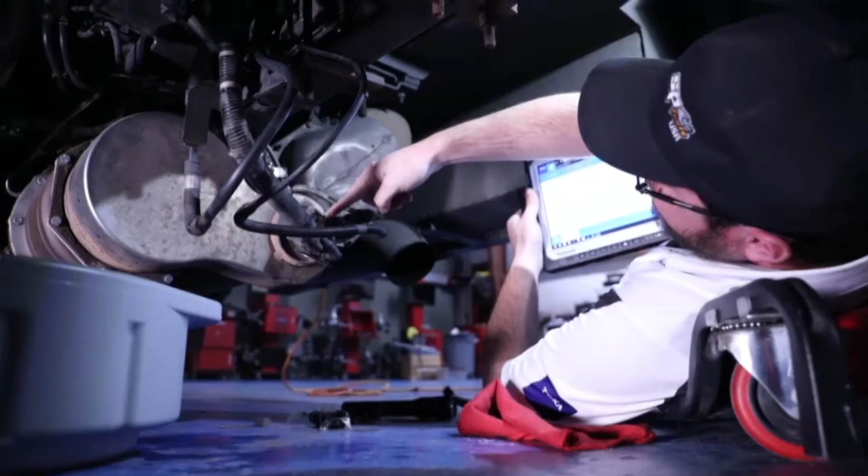Today I'm going to take you on a quick walkthrough and demo of the TEXA Truck Software. TEXA offers some of the most robust and complete coverage out of any aftermarket HD truck and medium duty truck scan tool. So let's dive in and take a look.

Alright, this is the first screen where we make our first selection of what type of vehicle we're working on, whether it's heavy duty, medium duty, or light commercial vehicle. We can also make selections just by powertrain if you just want to select the motor you're working on, or if you want to make a selection on the trailer. That's useful for like Wabco Bendix systems and the trailer brake systems.

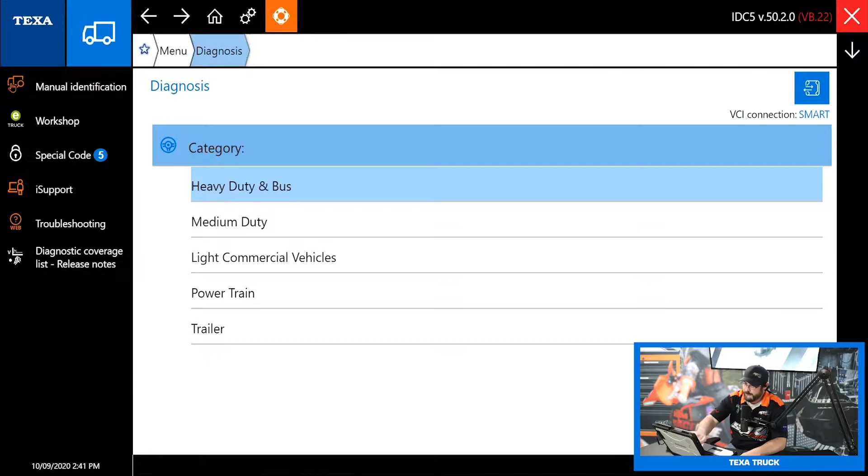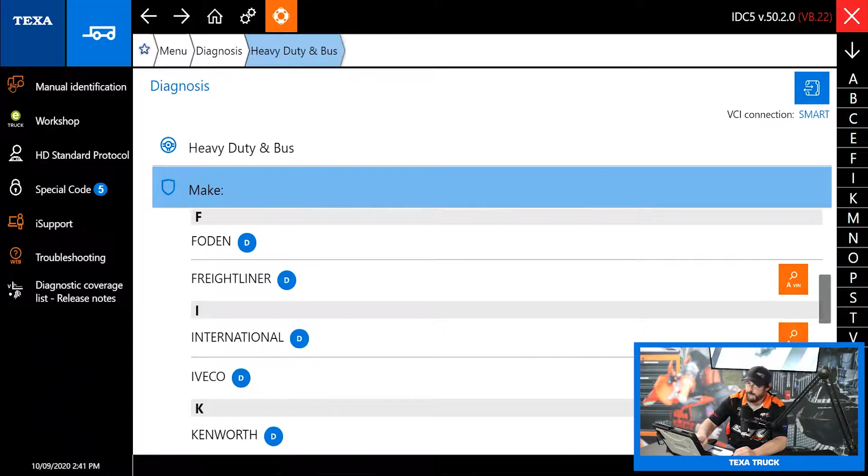Alright, so let's jump right in. Let's go into heavy duty and bus. And today I'm going to take a look at a Freightliner with a Cummins. If you guys can see the orange button on the right hand side of the screen, that's the automatic VIN scan. That can save you a little bit of time. If you go in, it'll just scan the VIN on the vehicle, make the selection for you, and then you're done. Today, since we're doing a demo mode, let's jump in. Let's say we're working on a Cummins.

Alright, so let's take a look on the far left hand side of the screen. The first option you guys see there is the eTruck Workshop. Now, if you're not familiar, eTruck is actually TEXA's remote diagnostic tool. It is way more than like telematics or fleet management. It will actually let you diagnose, clear codes. If you have a truck sitting on the side of the road in regen that's 2,000 miles away, you can, from your computer, reset the codes, clear the codes, do your DPF and SCR resets, and force a regen all from anywhere in the world as long as you have an internet connection.

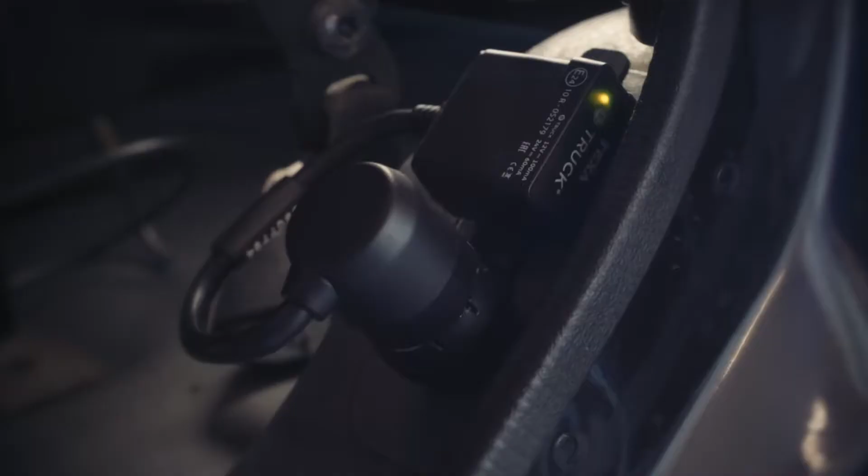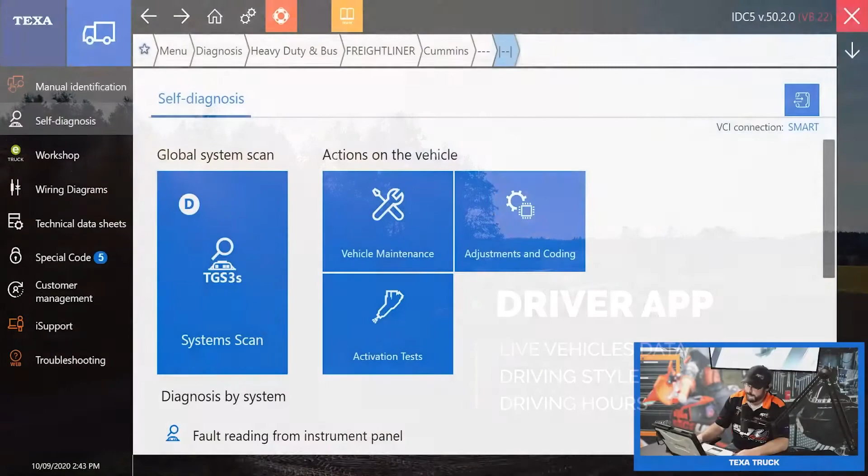So it's extremely useful for fleets in saving on a tow bill, which can be over $1,000 if you got a 53-foot trailer and a sleeper cab truck that's loaded down. I mean, that's going to be a hefty tow bill. So your shop foreman can force the regen from sitting at his desk at the shop, and also pull off any data he needs.

All right, so our next option is wiring diagrams. So let's take a look real quick. Let's go into diesel injection. We got to pick which engine we're looking at. So let's go ISB 6.7 with the CM2350, a pretty common setup nowadays. All right, as you can see, we got access to all the wiring diagrams here we would need for the engine. I can actually tap and select, and it'll just tell me what that component is on the wiring diagram, like it's the engine fault warning light.

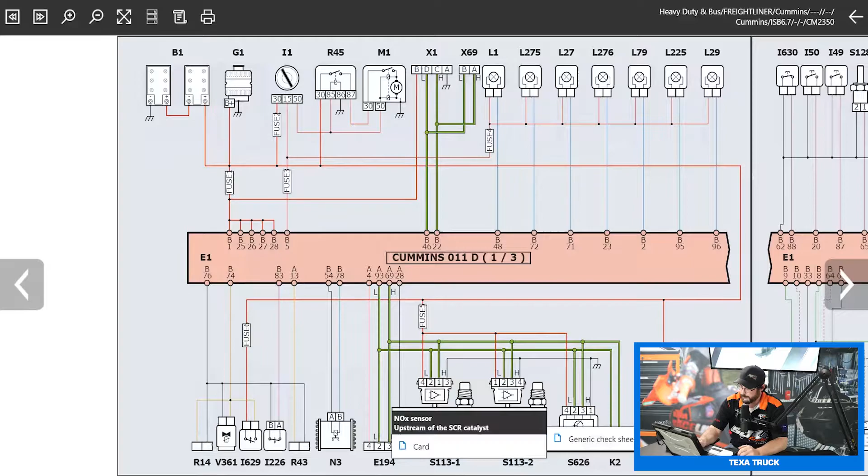Let's see what this sensor is here. This is a NOx sensor upstream of the SCR catalyst, and some of them will have this card available. This one's just a generic card. So this basically describes what the sensor does. It'll give you a picture of what it looks like, and actually the theory and operation of how it works, which can be really useful. If you want to be a good technician, understanding how the system works is the first step into making a proper diagnosis, in my mind anyway.

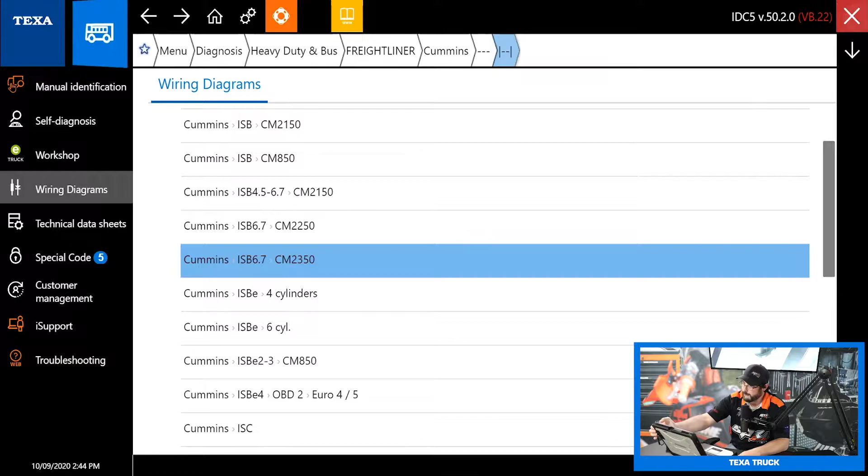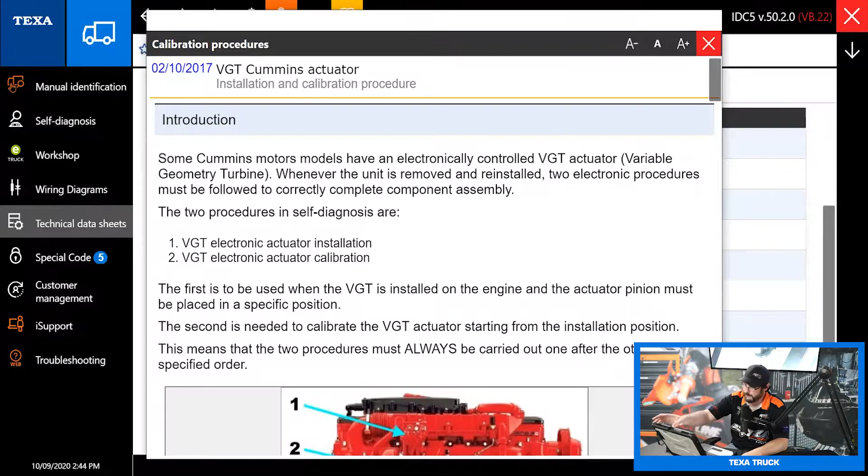Really handy for that procedure.

All right, the next one is this. You'll see this special code. Now, in the past, the web special code basically will unlock all of the really advanced functions of your TEXA scan tool. And the way it used to work in the past is you always had to have an internet connection, because it wants to talk back and forth to the TEXA servers to kind of track what you're doing when you made the repair to the vehicle. So if something does go wrong, we can go back through that data and make the adjustments we need to.

But now it works on a token system. So as you can see, the number of special adjustments I have left are 5. So now I can make 5 high-level advanced adjustments in the settings menu, which I'll get to shortly, without having to have an internet connection. So if I'm in the field, way out in the middle of nowhere with no cell signal, of course no Wi-Fi, that's not going to affect my ability to repair the vehicle.

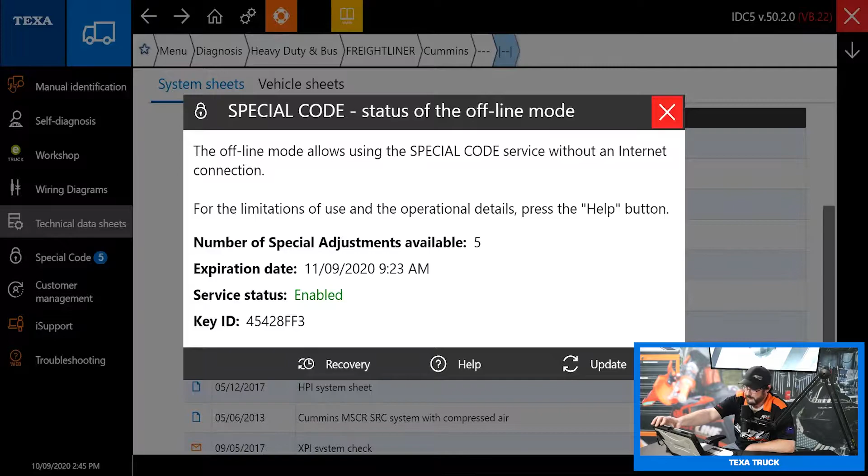All right, next one is just customer management. So this will let you store a diagnosis essentially on a customer by customer basis. So if you ever need to go back and reference a diagnosis, you can go back and view that information, if you need to be reminded of repairs you've done in the past, and that can be really useful.

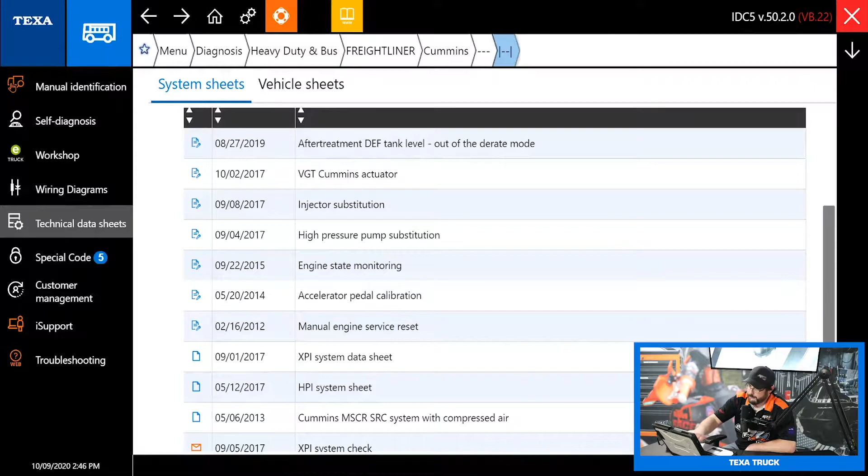Alright, that covers all the major points I wanted to hit, so let's go back to self-diagnosis here. Our first option is the TGS3s scan, so that's going to be the total global scan. That is going to ping every module available on the vehicle and then show you the status of it, whether it's got communication or not, and tell you if there's trouble codes present and how many trouble codes and what they are. So we have a demo mode available on this, so let's jump right into it. I want you guys to see what that looks like.

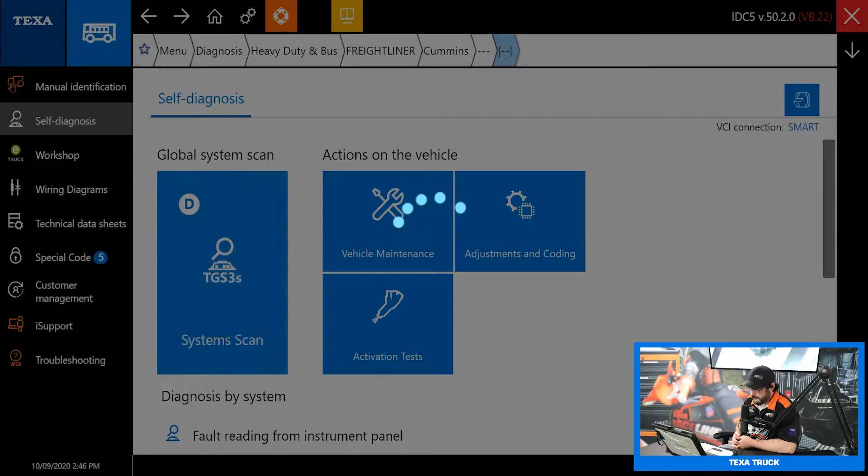Alright, it wants to turn the key on. It's going to go ahead and scan. It is worth noting this is a recording from a live vehicle. This isn't just a simulation somebody made on the computer. This was all taken off of a live vehicle.

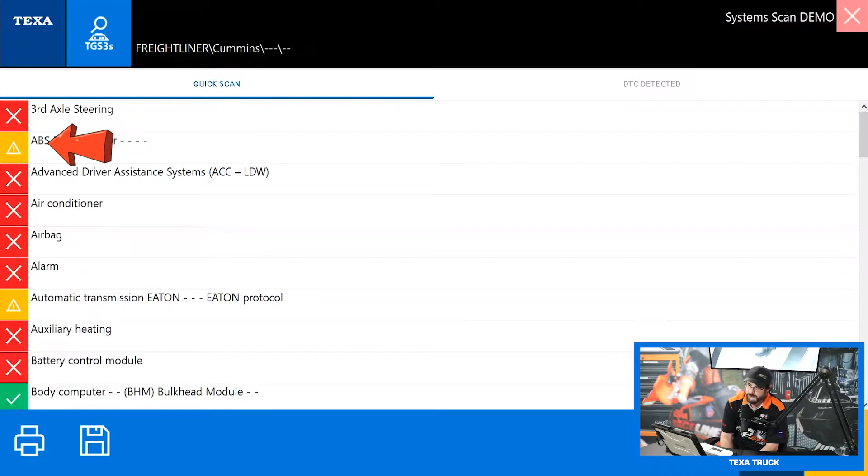Alright, so you see we got a lot of colors here on the left hand side of the screen. The red X, that means that we have no communication with that module, which generally means it's not installed on this vehicle. Like this vehicle wouldn't have an air conditioner module, so we don't have communication, so it just gets a red X. The yellow symbol with the triangle, that means that module is available and we have trouble codes in it.

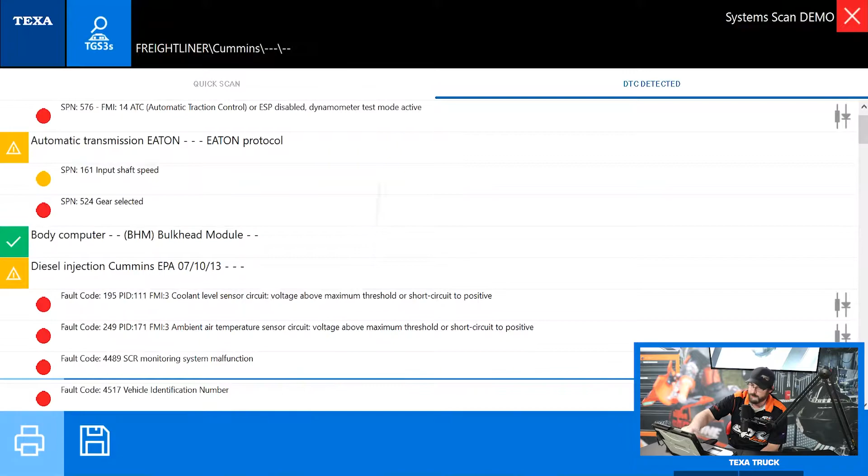So real quick, there's a couple of different ways you can do this. I just like to hit this flashing button in the bottom right, and that will expand and drop down all of the modules so I can see what all the codes are in every single module. So like in diesel injection, what do we got? We got coolant level sensor, ambient air sensor, SCR monitoring system malfunction, and also we can go ahead and see our automatic transmission codes and our ABS codes all on one screen, which is really nice.

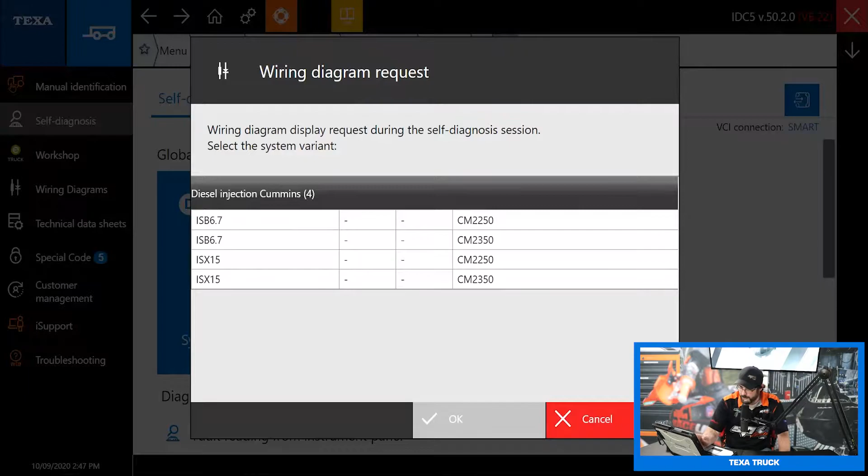And a new feature they did just add, if I select one of these codes, you can see on the far right hand side I have a wiring diagram icon. So that means I can highlight that code and I can hit the wiring diagram button. All you got to do here is pick which engine you're working on. So we'll say we're on an ISB6.7 with the CM2350. Then boom, see it's highlighted that sensor for me right on the wiring diagram. So that makes for a fast and easy diagnosis right there.

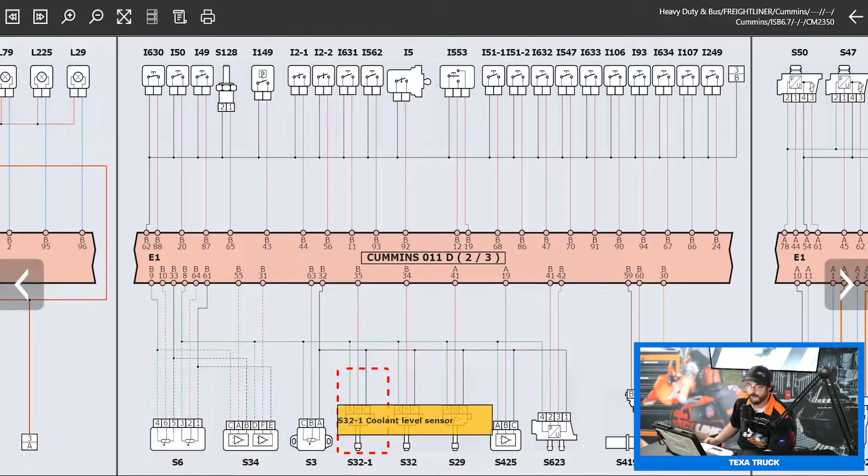See I got a 3-wire sensor with, looks like it's probably a common ground, and then in the middle wire we got our signal wire to the ECM, and then a common power. So immediately I know I can check my signal on the purple wire, see if that matches what the ECM is saying, and then I can verify if the sensor is good or not, check my power and ground, and then without having to go to another computer for any additional repair information, I can make my diagnosis right then and there. So that's really handy, really fast.

Now if I want to go into a module and get more in-depth information, all you got to do is just double click or double tap on the module itself.

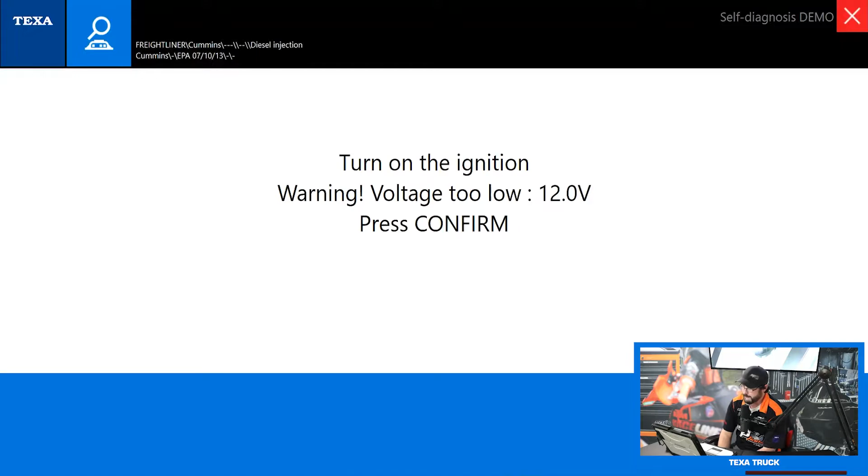And also warn you if you think your battery voltage is getting a little low, which is handy. Can't tell you how many times I've had a battery get too low and I'll lose communication during the middle of a diagnosis, and that's frustrating because I forgot to hook up my battery charger.

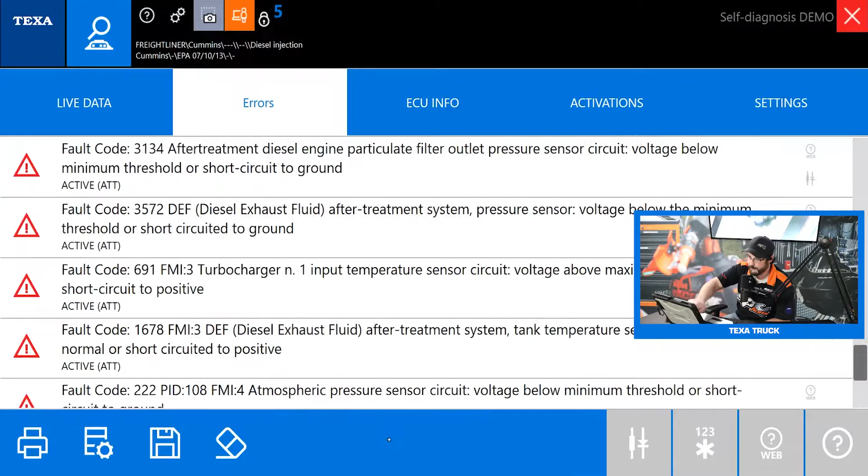Alright, so you can see right away that it defaults us right to the error screen or the fault code screen. That's usually the first thing you want to see when you're diagnosing a vehicle. And you'll have different colors for different faults. See, all these are red, and that means they are an active fault. Something's going wrong right now and the computer sees it, so that is an active fault. If it's yellow, that is a memory fault or an inactive fault. Green, when it turns green, that is when you've cleared the code.

So if I press the eraser button right here in the bottom left, that will clear all of the codes. And instead of all those just disappearing, it will just turn that icon green to let you know that they've been cleared, which is really nice. There's been a few times when I cleared codes before I really should have, and it's nice to be able to go back and reference what those codes are, so you can go make your diagnosis from there. And those will just stay green until you back out of the module and then go back and start your diagnosis again, and then they'll actually be gone. You won't be able to see them after that.

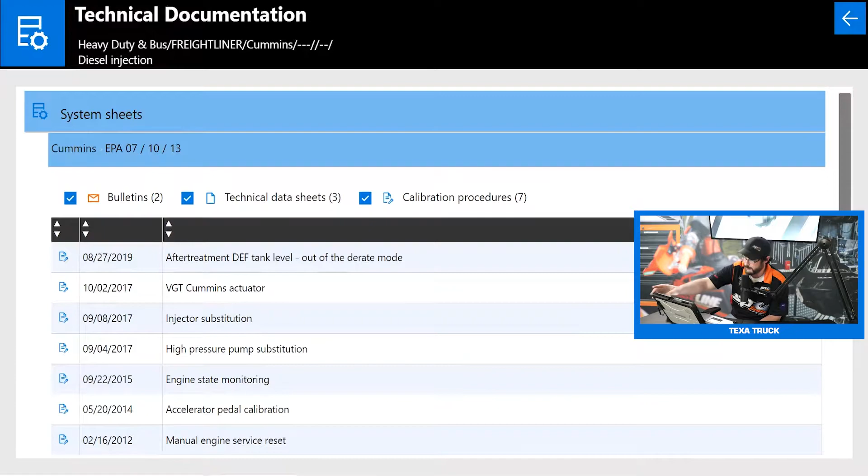Alright, the other buttons we have available on the screen, bottom left we have a print button, so we can go ahead and print a report. The next button close to that is just a shortcut to the screens we were looking at earlier. So system sheets, vehicle sheets, and wiring diagrams are all available here. So like if I go here, there's that VGT Cummins actuator calibration procedure. So you'll kind of see that button sprinkled throughout the software because it's really nice to be able to reference that no matter where you are. We can save this, so essentially that's just saving a report of what all fault codes are here, and then of course the erase button.

Now I want to talk about some of the buttons we have on the bottom right hand of the screen here. Now if you look at every single one of these trouble codes, you see some little icons off on the right. And the first one is the web icon, and that is TEXA's additional repair information. That is called iSupport. And that is an additional subscription.

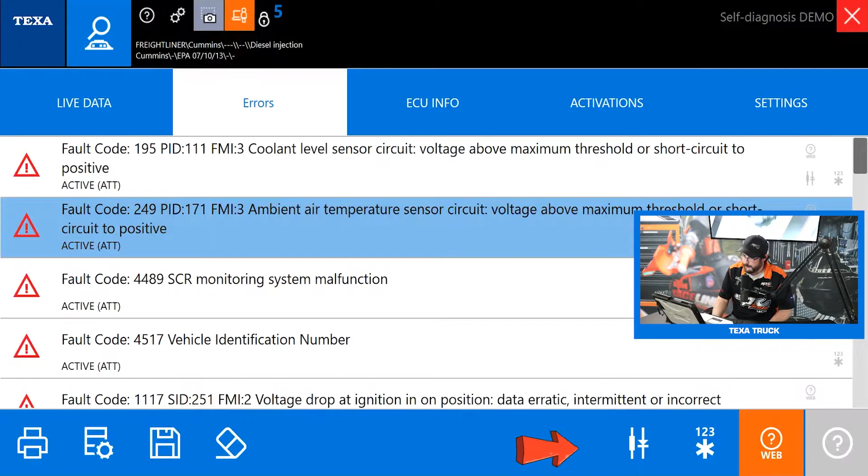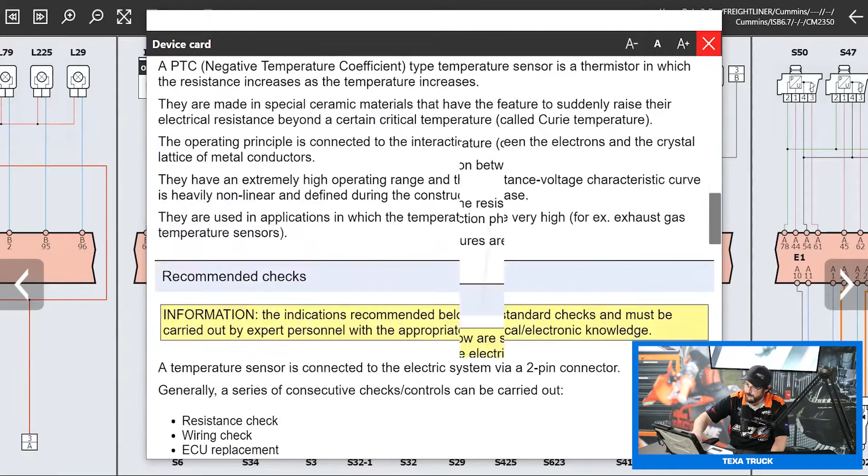All right, the next button is just the wiring diagram button. And that is the same as earlier. If I highlight a code, select my engine, and then it's going to take me straight to the ambient air sensor on the wiring diagram immediately. I can see it is a 2-wire sensor. There's a card available for this one. And here it's going to take me to a temperature sensor card and give me the general theory and operation of that sensor and a picture of what it looks like.

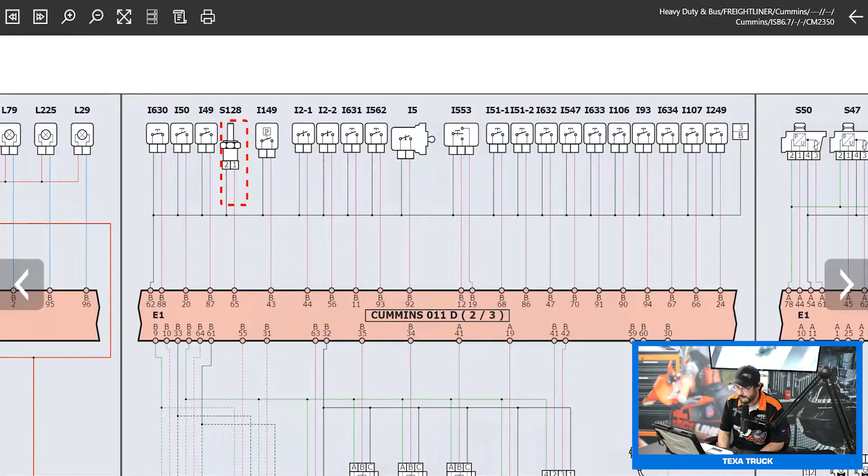So right away I can see, looks like we got a common ground and then a signal wire to the ECM. So I can go ahead and check my ground, check what my signal wire is doing, and I can make my diagnosis from there. Easy peasy.

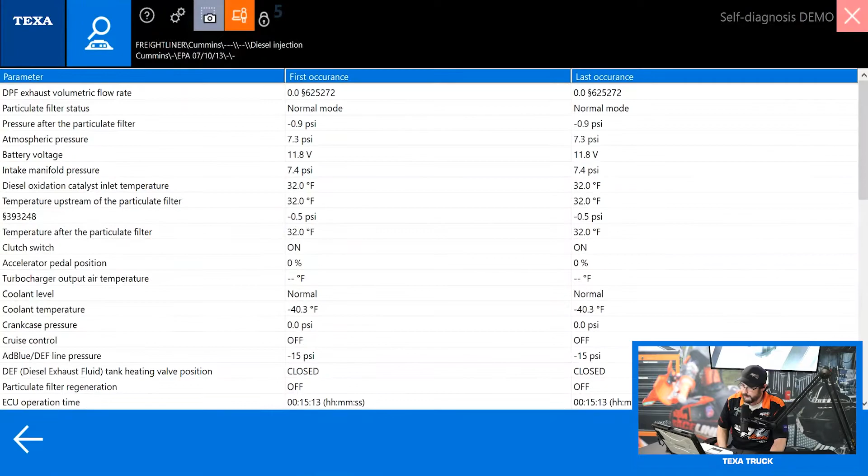Alright, last button is just the freeze frame information. That'll just give you your freeze frame information for when that code was stored, which can be handy in a diagnosis for sure. Alright, so let's jump over to our live data screen.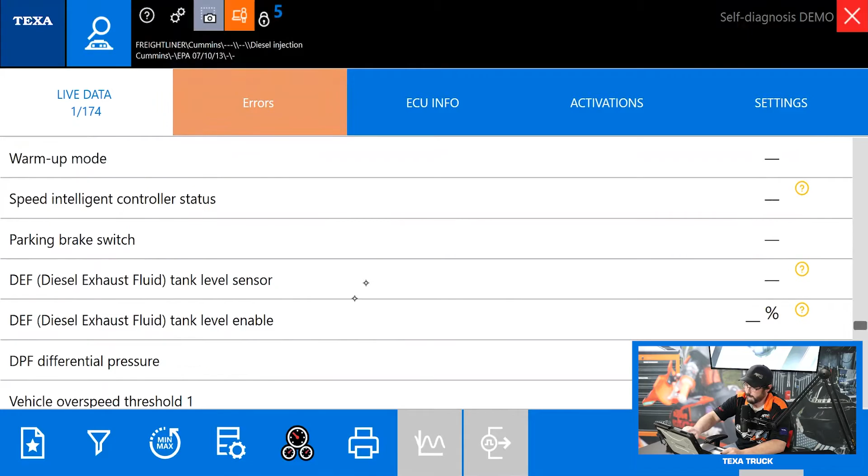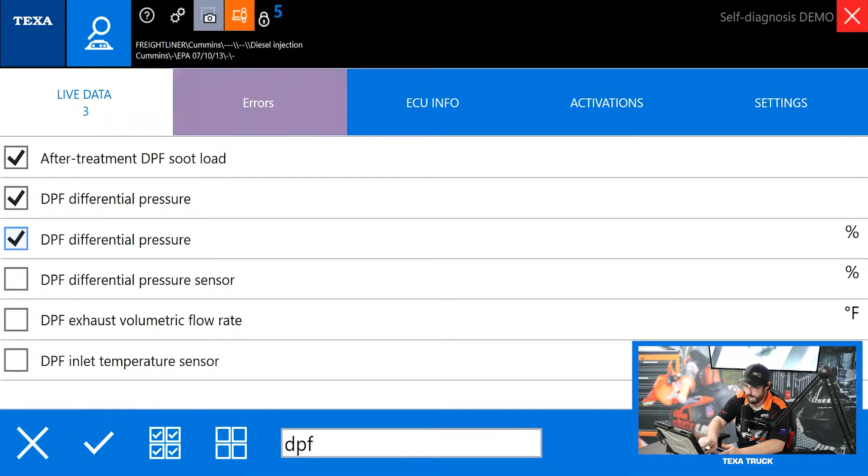As you can see, we got a ton of data PIDs, 174 data PIDs on this engine. And if you're scrolling through here trying to find one that you need, it can take just way too long. So what we can do here is we can use our filters. So now I can just go here and I can just type in, let's search for DPF. Because usually you want to see your DPF soot load, so we want to see all our differential pressures. Hit our check mark, boom, there's all of the data that I want to see.

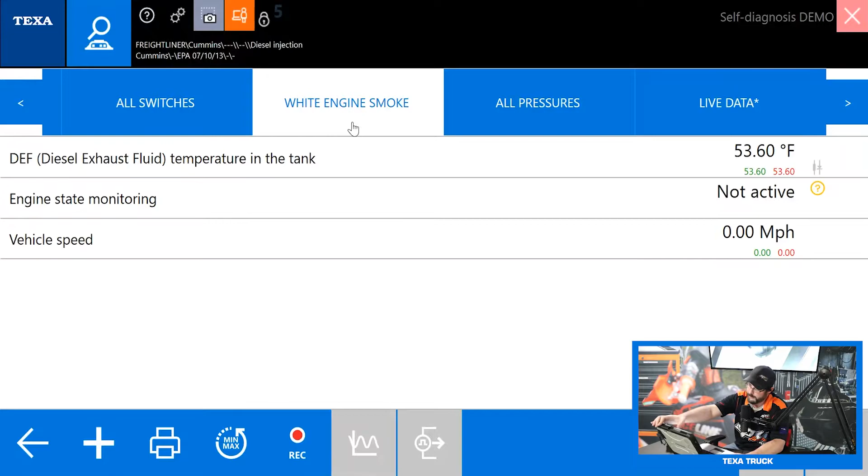And also another thing you can do with filters, you can go to a favorites list. And we have some already pre-made for you of some data PIDs we think you want to see, like if you have white engine smoke, here's some data PIDs you may want to look at. But you can also save. You can see, I hit this plus button, type DPF just like I did before.

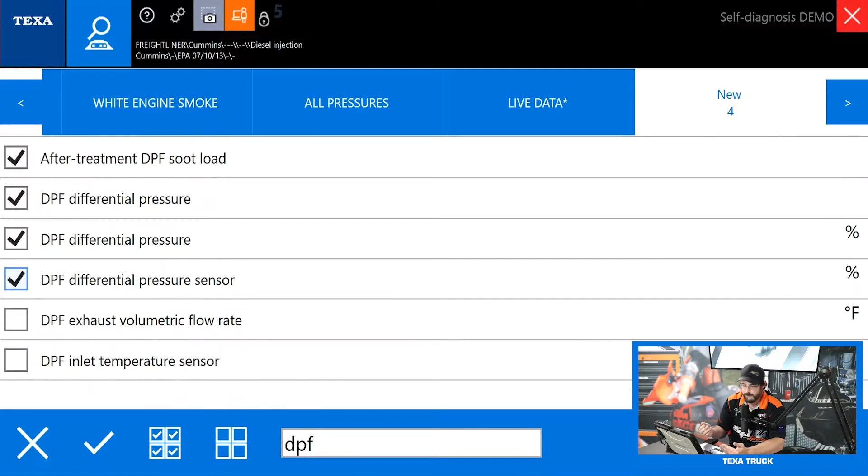I want to see all these data PIDs on a particular screen because that's like a common thing I want to do when I'm checking the aftertreatment system, which you'll be doing a lot with these vehicles. I hit check. I'm going to save this as DPF data. Boom, there we go. That will always be there now. Not just on this vehicle. Anytime I work on an EPA 2013 ISB with a 6.7 and CM2350, which is a really common setup, this option will be there. My customized saved data PID list will be there, which is really handy.

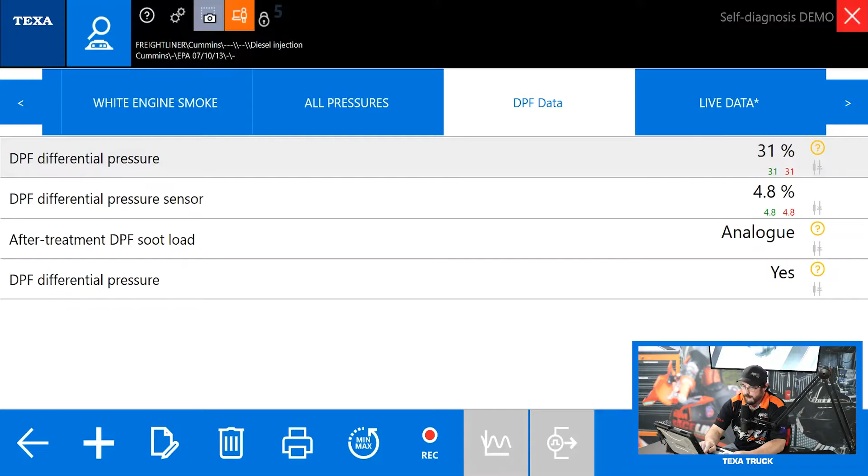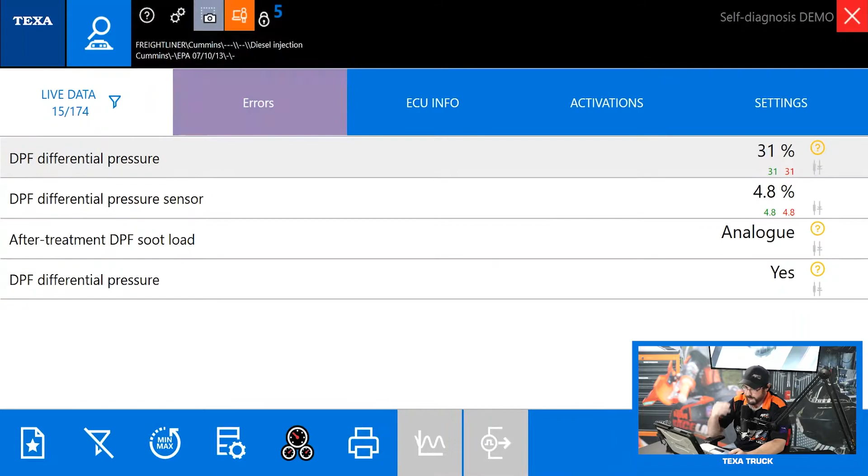And you can also, all these other buttons down along the bottom, we just have the edit button going from left to right, then the delete button, you can trash it, and then of course you can print the report. So let's back out to our main live data. If you want to get rid of your filter, you just press the filter button again. Now we're seeing all the data PIDs.

The next button, going from left to right, is the min-max refresh button. All that does, you see these two little numbers under every data PID that are red and green. Those are our minimum and maximum value, and the reset button just resets that if you want to see your min-max again. Next button is just the same shortcut to our technical documentation. I'm not going to get into it again. It's the same stuff, same place we found the VGT actuator calibration.

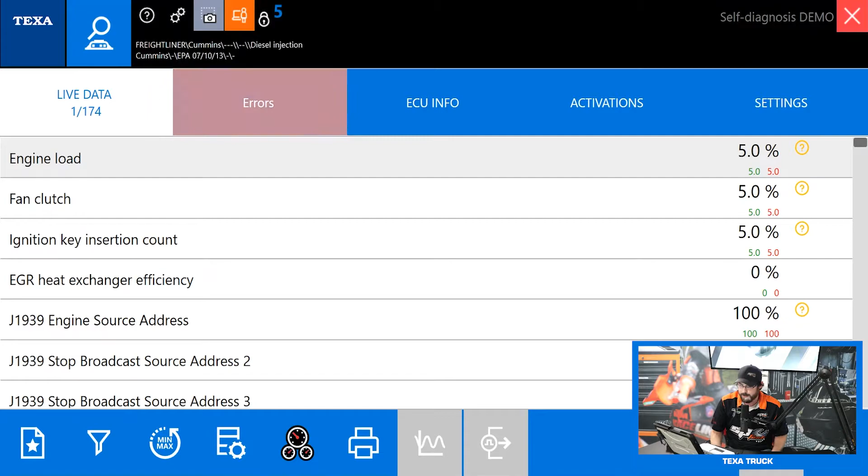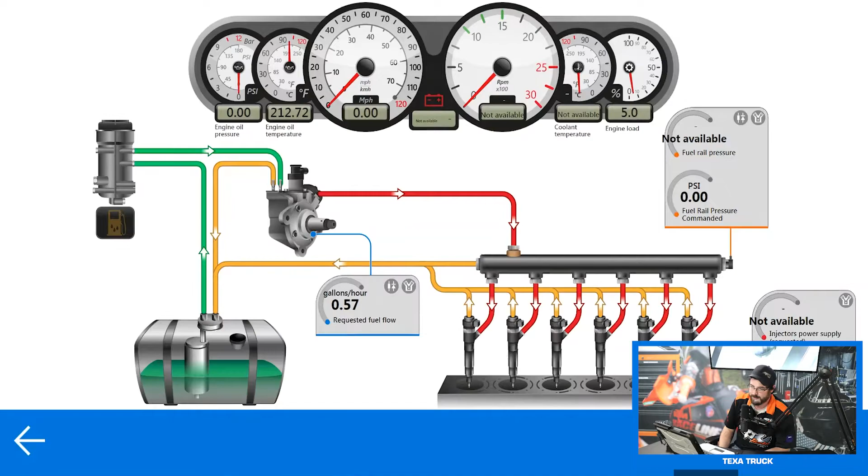Alright, this next button is pretty neat actually. This is the dashboards. So this is just a visual representation of the data, and it can help you make a lot more sense of the live data. So this first one is just our fuel injection. So we can see our fuel rail pressure commanded, injector power supply, gallons per hour of fuel coming in.

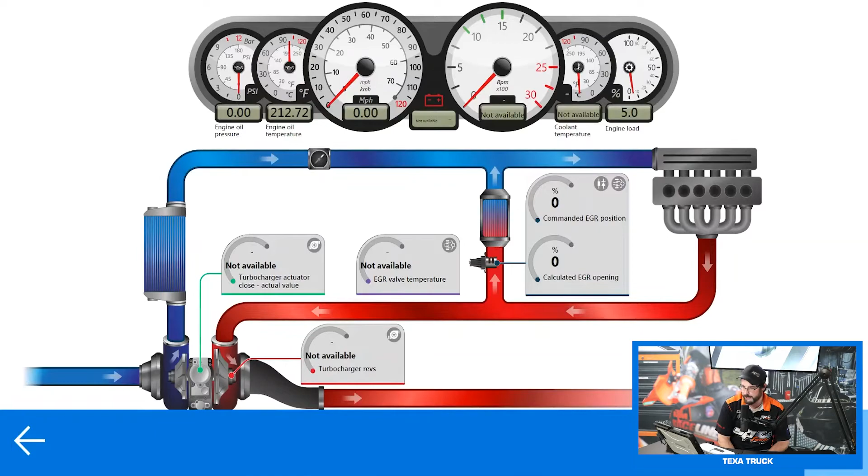Well, if you arrow over to the right, now we're seeing the turbo. So we can see data like our EGR valve temperature, turbo actuator close actual value, and turbocharger RPMs all laid here in a visual way that makes it a lot easier to understand. And what dashboards are available will depend on the vehicle. They're available on most everything.

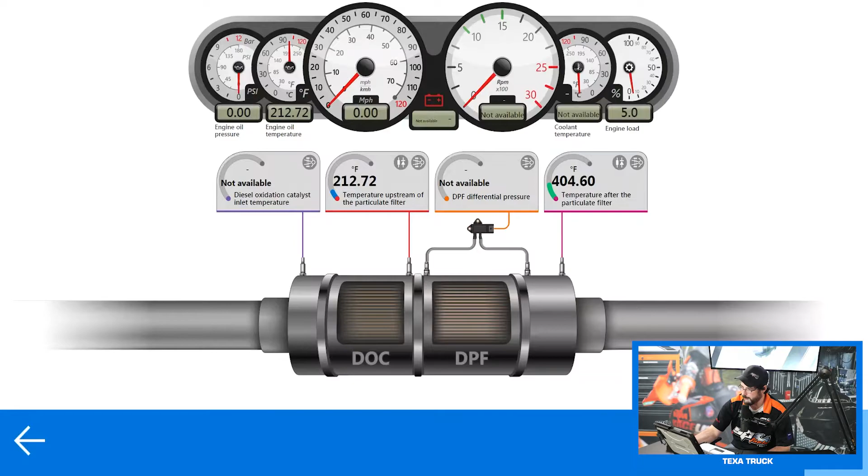This one is really handy too, actually. This is the aftertreatment system, so you can see your pressures and temperatures of the DOC and the DPF, and then the SCR system, so you can see NOx levels, diesel exhaust fluid temp, dosing rate, things like that. Alright, so that about covers the dashboards.

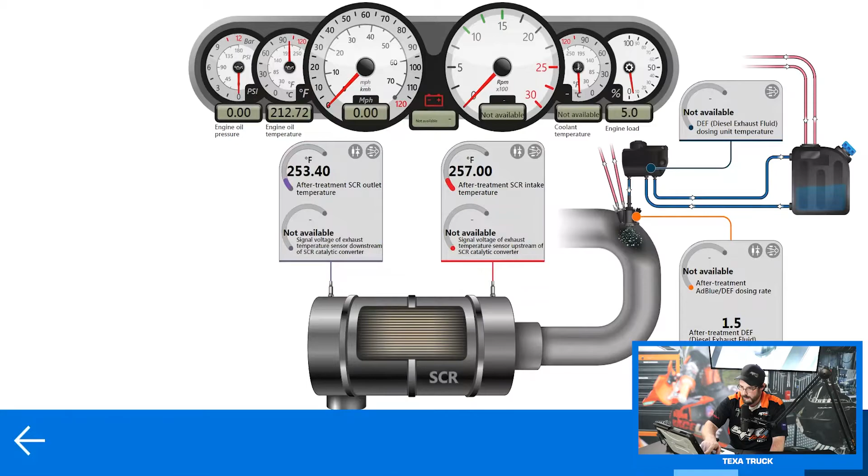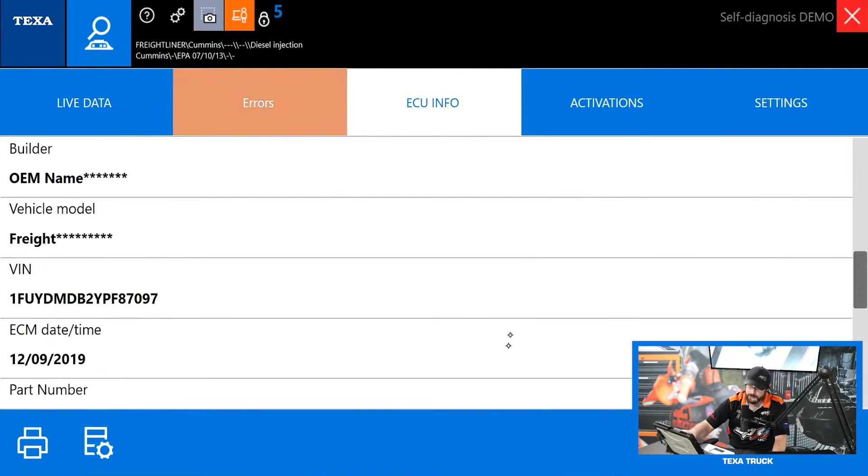The last button is just a report print button, so that's just going to print a report of all of our live data. So let's jump on over to the ECU Info tab. This is going to be all of your ECU control unit identification numbers, calibration IDs, serial numbers, VIN number will often be here as well, and your engine operating hours, which a lot of you guys like to see, will be right here in ECU Info. So not much going on there, just some general data that you may need to make note of.

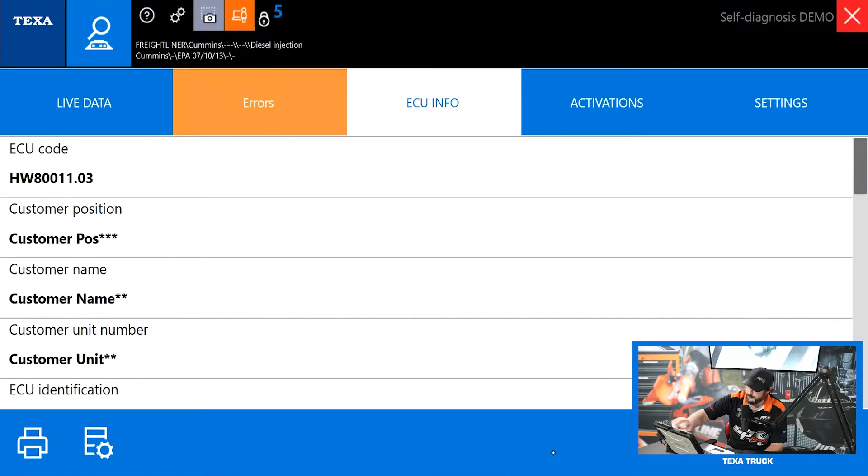Alright, so let's jump over to the activation screen. Activations are just things you can turn off and on and tests you can run, not stuff you can change permanently. So here we have like our DEF system leak tests. Your cylinder cutoff test will always be here in activation. That's a common one guys will use.

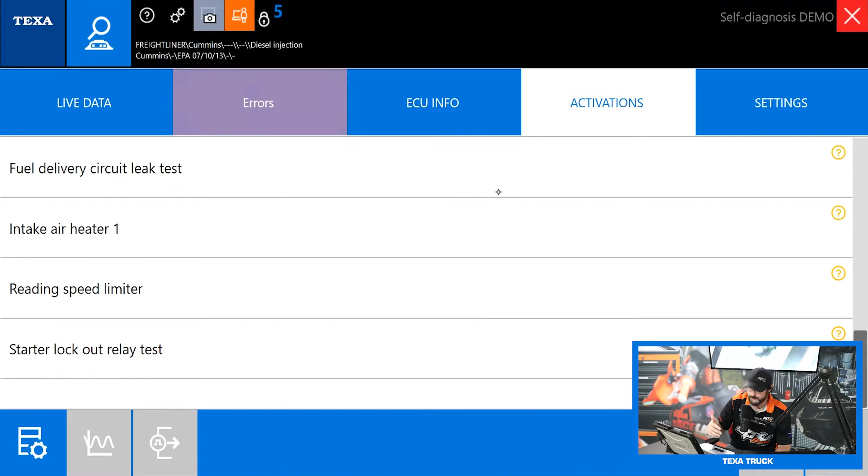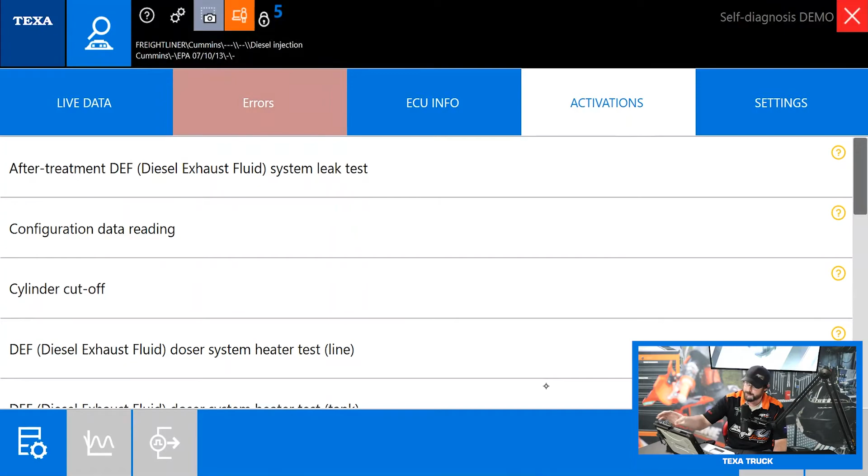Fan test, like if you want to turn cooling fans on and off, you want to actuate solenoids, that's always in activations. The main difference between activations and settings is stuff you can change permanently. So when you change this stuff, it will stay changed. So let's take a look at settings real quick.

Hang on, no, we're good.

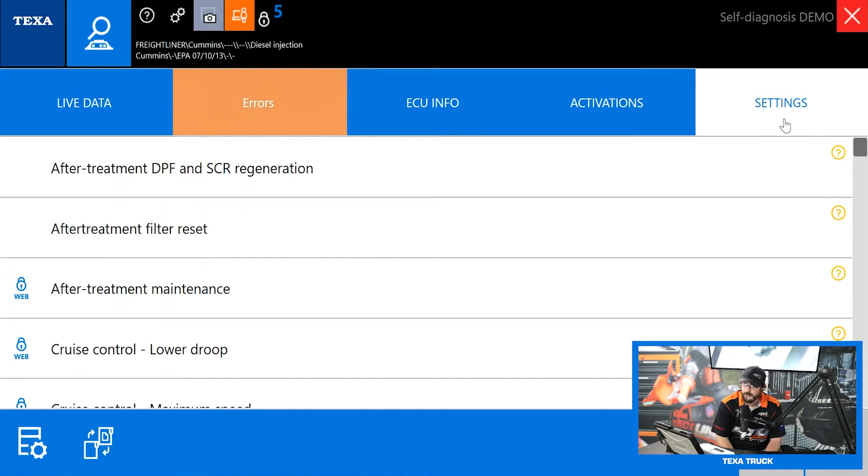So let's take a look at settings real quick. This, like I said, is going to be all the stuff you can change permanently. And you see a lot of these have the web lock icon on the far left side. When you first get your scan tool, there will be a form in the box you need to fill out. That's just called a web lock form.

Basically, all it is is a waiver saying that this software is capable of some very advanced features and functions. If you don't know what you're doing and you go in here and start mashing buttons, you can really mess stuff up. And basically, that's just saying that's not on us if you get in here and start pressing buttons and mess a truck up.

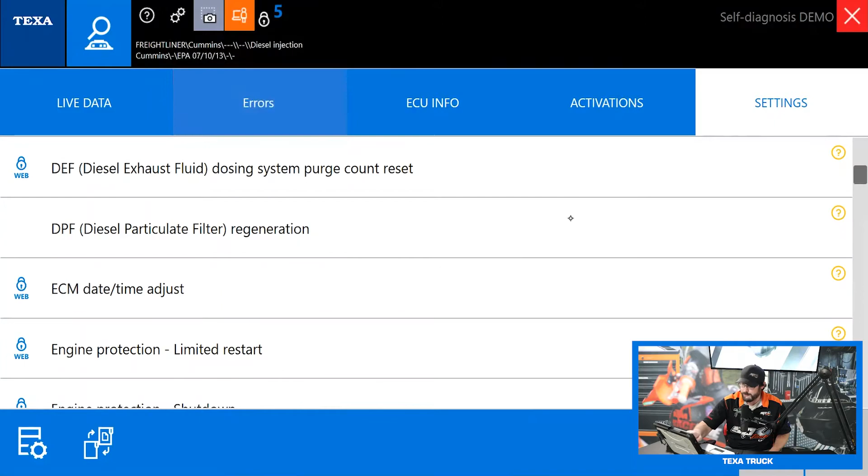But most common things people want to see in here are like after treatment filter reset when you either clean or replace the filter. Your DPF force regeneration will be in here as well. Another one is, of course, idle speed and idle shutdown. You can either change the time it waits till it does idle shutdown or turn it off altogether.

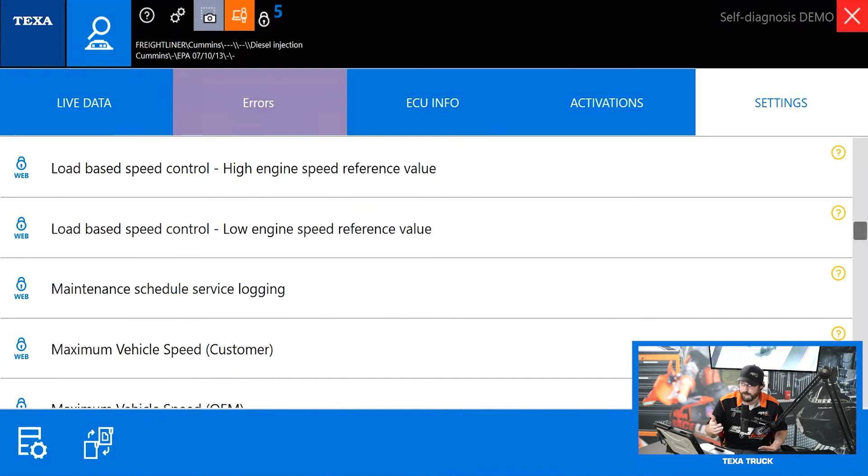Something I do want to touch on in Cummins in particular is the maximum vehicle speed, because speed limiters are something that customers want to change a lot. And the way it works, you have the OEM speed limit and the customer speed limit. And you have to change both of these. The customer limit can never exceed the OEM limit.

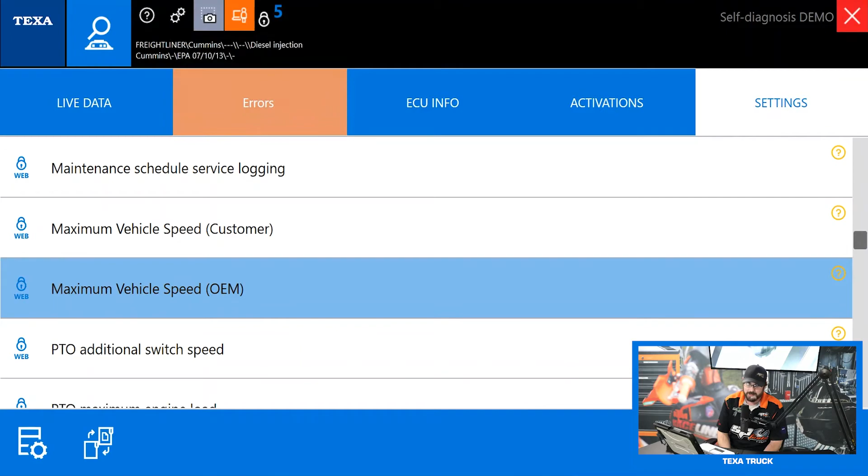So say your OEM speed limiter is at 60 miles an hour. It doesn't matter how high you put that customer limit, it will never go over 60. So the procedure for changing the maximum vehicle speed is go in here, change the OEM speed first to what you want it, and then change the customer to match it, and you're good to go. That's all there is to it.

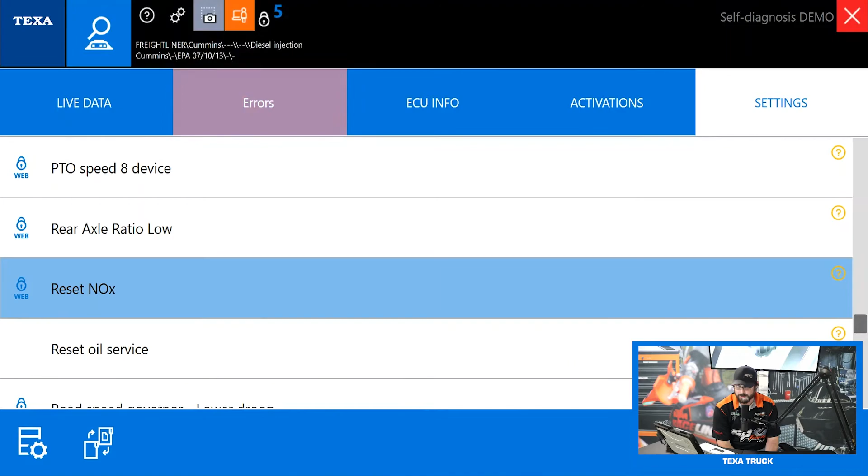Also got your PTO, all your PTO configurations are in here. Reset NOx, that's one you're going to be using a lot in Cummins. So the procedure for that is generally when you want to do a regeneration, you reset the NOx first, then force the regen. That's how you do a regen on a Cummins CM2350. Pretty simple, easy procedure. Once you start it, it'll just go and go.

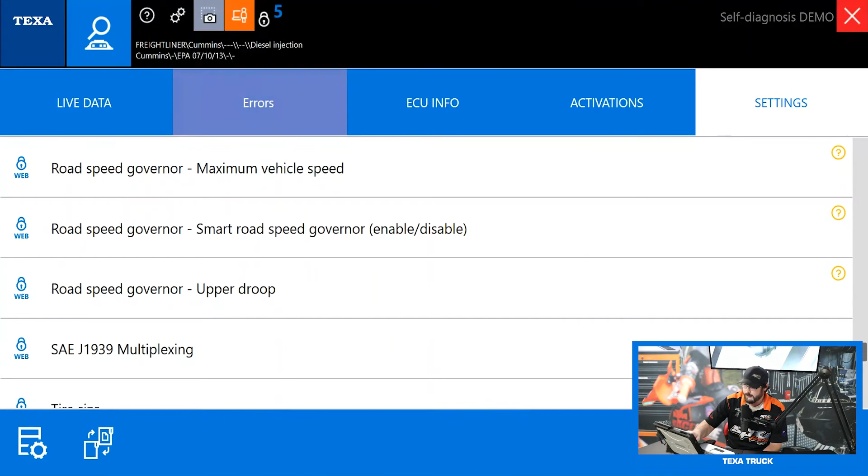Let's see, something else. Yes, down here at the bottom, another common one. VGT electronic actuator calibration will live here as well, and installation. And again, in the bottom left, you have a quick shortcut button right to the technical documentation where it will give you the step-by-step walkthrough and procedure for doing that VGT installation and calibration.

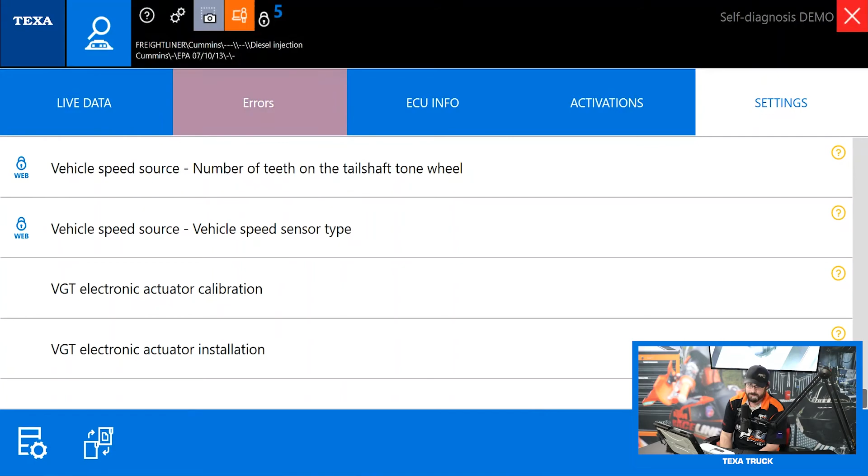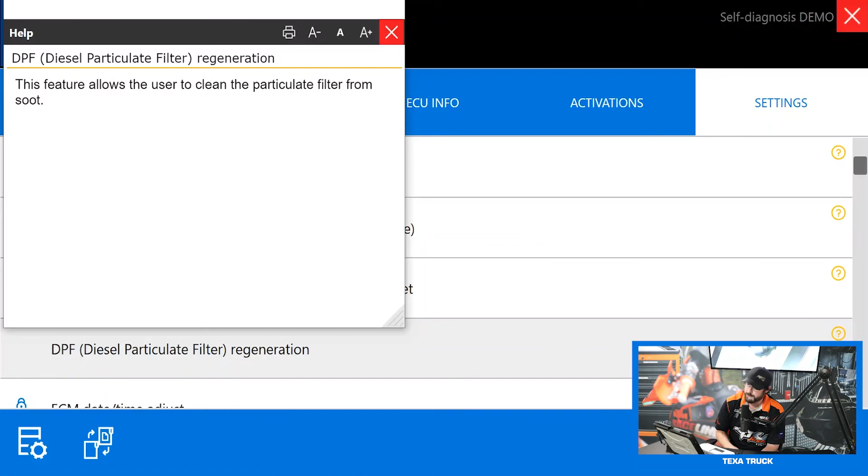Let's see. Only other thing you'd want to touch on, let me find, DPF, diesel particulate filter regeneration. So you can see it's got the yellow circle with a question mark on the right side. That means there's a help screen available. So let's see what it says. That just describes what the setting does, if you're not clear on it: this feature allows you to clean the particulate filter from soot.

Alright, so that about covers all of the main features of the TEXA Truck Software. I tried not to get too into the weeds on this stuff, just hit all the major talking points.